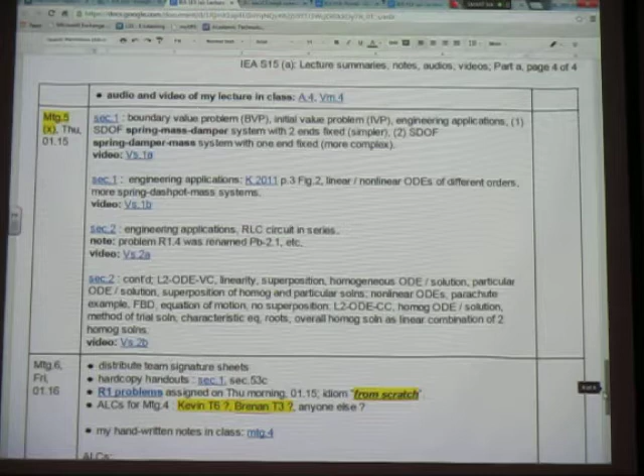Zoom in here. Yeah, I printed this out already. Maybe don't pick up the loose leaf. I'm never doing that, dude. I'll pay for it. For myself. It's not like he pays for it. Yeah. I'm just curious how long we're going to do it. It's usually a week, 2 weeks. Nothing left for me. Maybe I still have it for me. Yeah, I have the loose leaf here, I think.

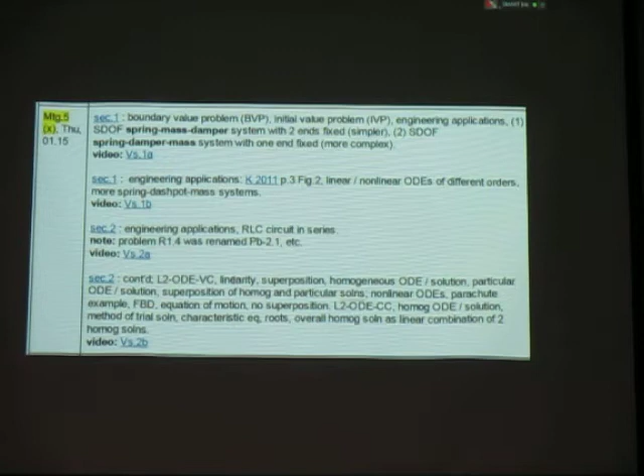This is the extra meeting for yesterday, what I call meeting 5 with an X for extra meeting. That's essentially a review of scalar differential equations that you have seen in the differential equations course. And I have the lecture notes, as well as the lecture videos that I created. So lecture notes, for example, section 1, then you have the videos in 2 parts. And section 2, you also have the videos in 2 parts. So for those of you who need to review, you can make use of these resources.

And I gave you the hard copy of section 1. For those of you who came late, check with your teammates, because they probably kept a copy for you. Section 1 is on 4 pages on 1 sheet. Same thing for section 53C, which we will do after we finish section 53B. I would encourage you to print out a hard copy. Even printing 4 pages on 1 sheet, it's very readable, very legible, because the font size was large. And in the back, you can write notes either on the lecture notes or on the back of the sheet.

Okay, so that's about section 1, and that's also related to report R1, the problems in report R1. So I'll talk about that. The R1 problems can also be accessed through the portal. If you go through the portal, I have a link. Let me zoom, so it's easier to see. Here is the link for the problems for report 1. You can access it through various means. The portal is very compact, so it loads up very fast, or you can also access it here, because whenever I do something, I always have a few points as a reminder in the daily summary.

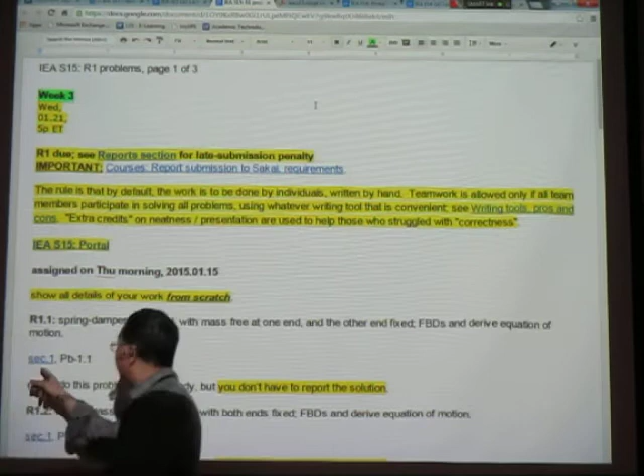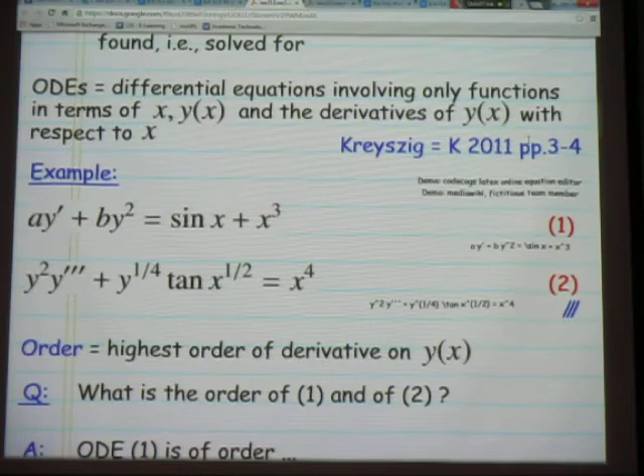And to each problem I have a link. So for example here you see section 1, problem 1.1. So you can click at section 1, you see my lecture notes, and you look at problem 1.1, that's where the statement is. Okay, there's no need for any text here. If you would like to read something to complement, that's fine. But this is where the lecture notes and the lecture videos are on this topic, and the problem number is also listed in my lecture notes here.

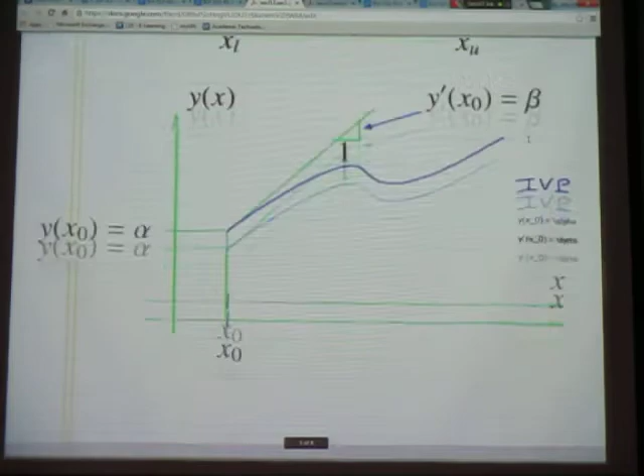So I have lecture notes, lecture videos, and we'll come back to this problem soon. Okay, so the problem numbers are listed here. So everything is very convenient. There's a link, just click at the link, it brings up the lecture note, and I printed out my lecture notes section 1 to give you as a hard copy too. So you have a soft copy, hard copy. It's very easy to find. If you are still confused, please feel free to ask. And you have a team, so your teammates can also help out as well.

And I have provided the self-help solutions, which were the best solutions and best reports from last semester. I really suggest that you try not to look at the best solution, do it on your own, and just if you get stuck, then look at that. But I'm here, Michael, your teammates. There's a lot of resources. Okay, so I have also reduced the number of problems that you need to report in your report. So a lot of steps have been taken to really make your experience smooth.

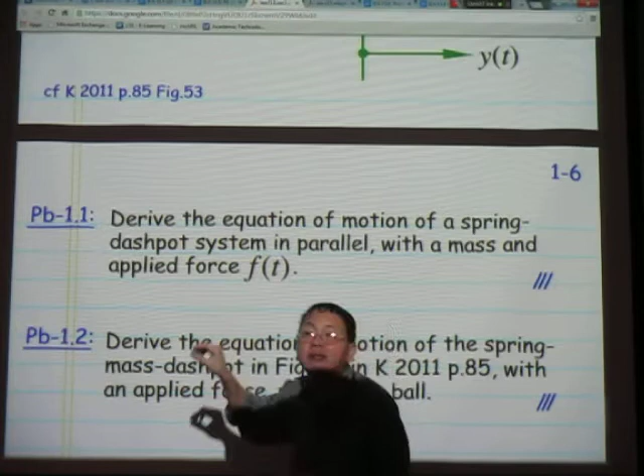So if it's something like this, it's not sufficient, it's not self-contained, then you have to go and look somewhere else. Okay, so you want to rewrite the problem statements as self-contained as possible. And the reason that I write as compact as this is because whatever I have written in my notes upstream, that's part of the problem statement. Okay, is it clear to everyone?

All right. And you have the model reports. Talking about the model reports, if you bring up the portal and you go to reports, here I provided some really beautiful work.

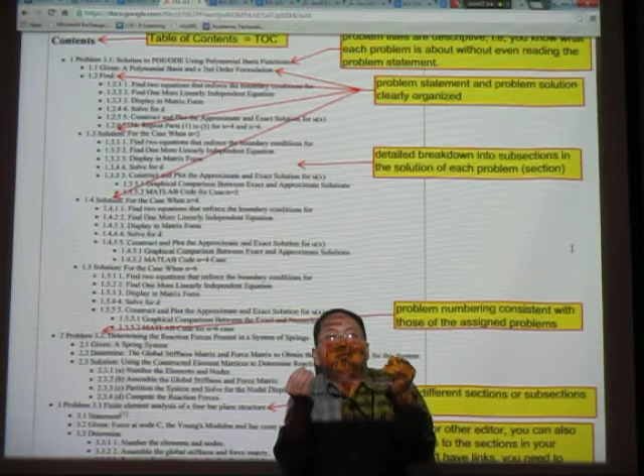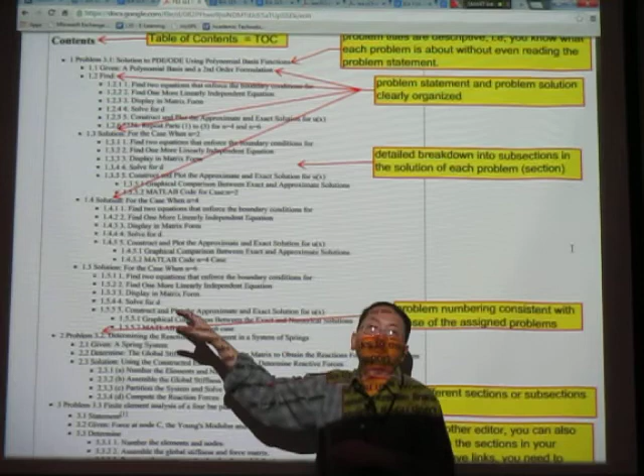This is graduate level, but I have also provided reports at the undergraduate level as model reports, in addition to the best solutions and best reports that are in the resources. Table of contents: when you read the title, it really gives you an idea of the content of the problem without having to look at the problem. That's what you want, right? You don't want to have just the numbers, but a descriptive title in the table of contents. And there are more that you can go through and see what would be desirable.

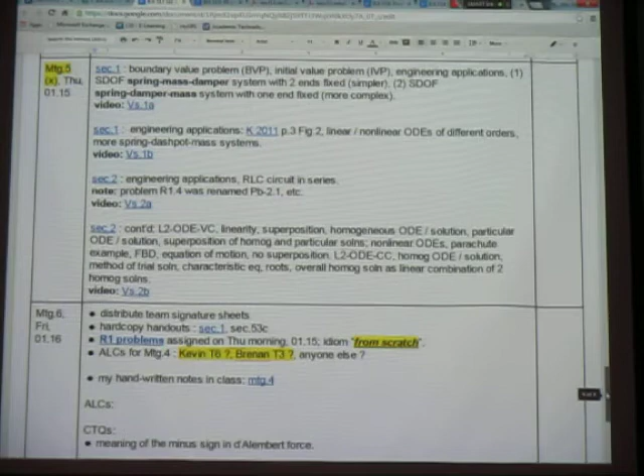Okay, here I mentioned best report to emulate. Oh, I just moved best report to emulate to the top. Okay. All right, so that's the model report there. This is the portal. And so you have lots of resources and places to look at to emulate. Excellent.

Okay, so last time I had mentioned, I remember, this is just after I came back. So Kevin, team 6, and Brenan. What team number, Brenan? Is it team 3? Yeah. So as I advise you, really look at this document every day, and if you see that your name is missing, send me an email. Okay. Yes, you have a question.

How would you like us to submit the reports? Through Sakai. There's a requirement of how to submit. PDF, all PDF. Yes, please. No hard copies.

So let's answer. I'm sorry. I know your name. I need to learn your name. I know I have written it up here. Morea. Okay. Yeah. Yes. Okay.

If you go to report 1 statement, you see here, course report submission to Sakai requirement. So please look at this. Everything is made in such a way that it's convenient, just one click away from the information that you need.

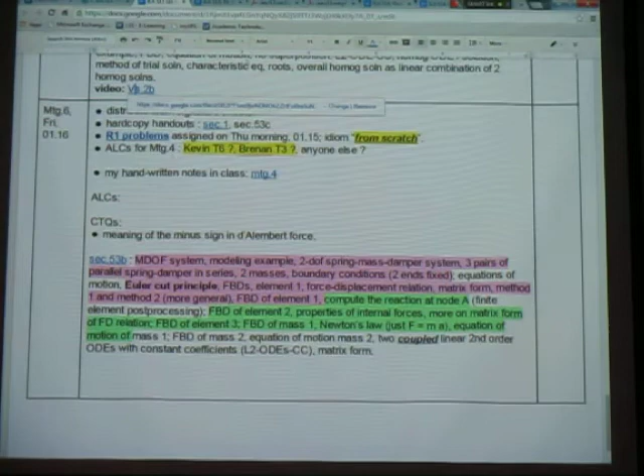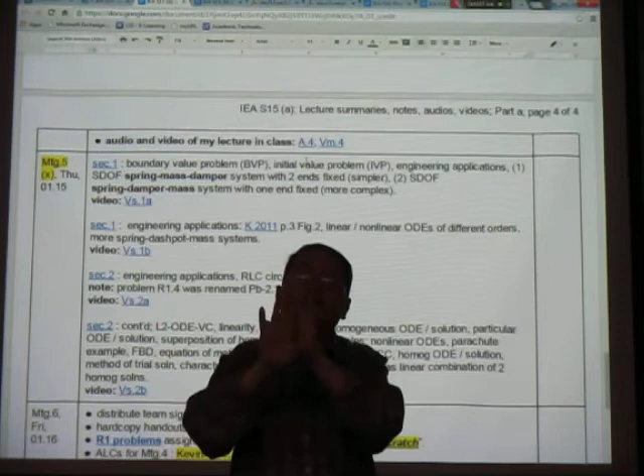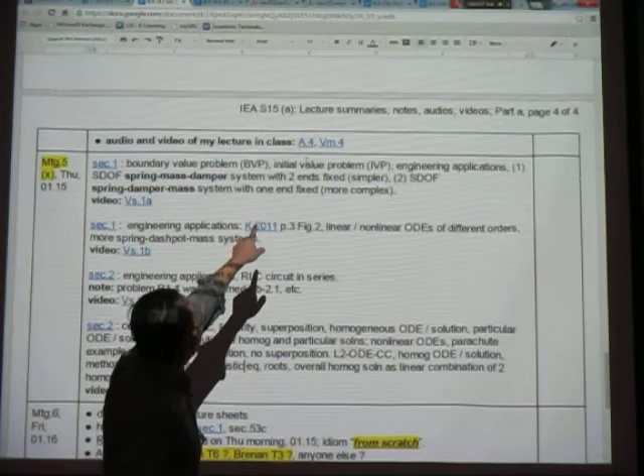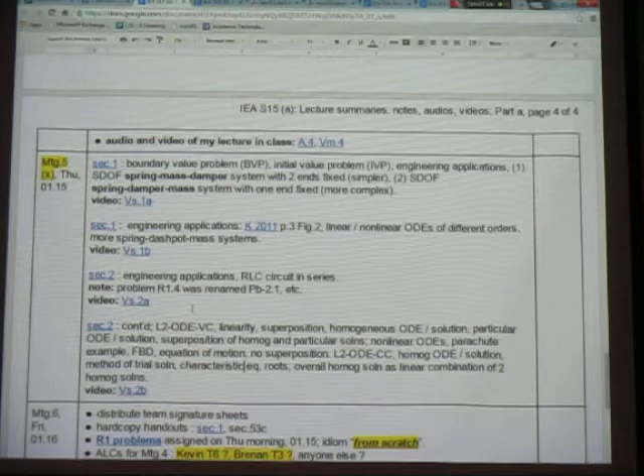This is talking about the video and the audio. If you want to listen to the audio, or synchronize the audio with the video, the sound of the video is pretty good because it's close to me. But if you need to synchronize the audio that I recorded through Audacity and the video from the camera, if you use Google Chrome, you can just click and play. You don't need to install the audio codec. But if you want to download and play on Windows Media Player, I gave the instructions at the top of the document. Okay.

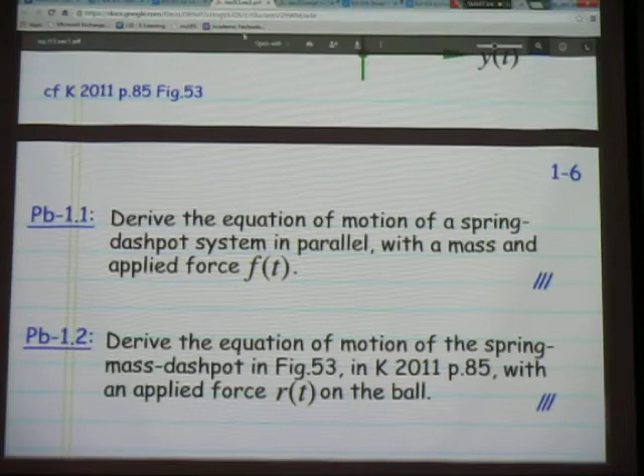So if you have further questions, I can entertain any questions. If not, then let's. You got one right here. Yes. I need to learn your name. So we'll come to your questions and Kyle's questions too. I have it written here, the question that you asked me at the end of last class.

One more question for the report. Is it just one report that we submit for the whole team? One report per team, yes, unless you do it individually. And one person will submit it for the team? Yes, one representative submits on behalf of the team. Suppose you have a team of 6 or 7, and 1 or 2 want to do it individually and the rest do it together, then there would be 3 reports, right? Anyone who wants to do it individually submits on their own, and the rest submit as a team. Is it clear? Maria, question.

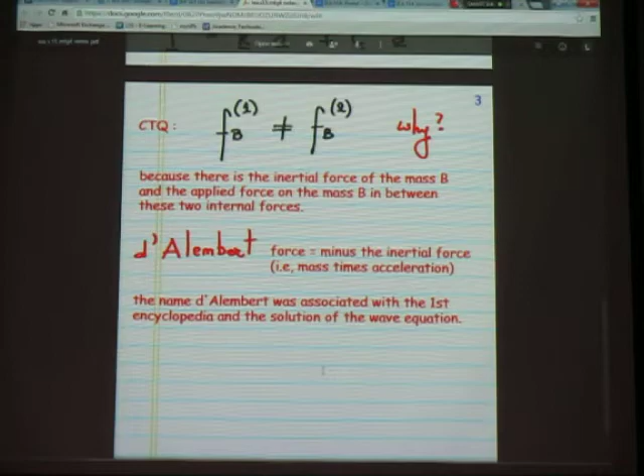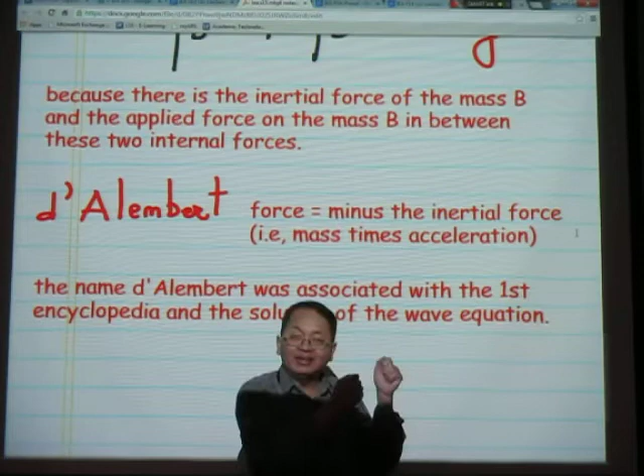Okay, right. So let's start meeting 4. As a way to have continuity with what we did last time, this is the note that I have annotated, my handwritten note from last time. And so this is the D'Alembert force. I think Kyle at the end of the class asked about the meaning of the minus sign, and I gave two times in the last lecture the physical meaning of an accelerating car: your body is pushed back against the seat.

And what's your name again? Matthew. Matthew, what team number? Team 8. Team 8, okay.

Matt also asked me a similar question, and so I thought of a different way to explain this. So let me bring up my journal tool. Okay. And I need to turn off this one here. Okay.

Right, everyone heard of the famous expression F equal to ma a long time ago. So let's say you work only in the one-dimensional case, and you have a particle moving on a straight line. Let's say this is the particle; you can have several forces applied. Even though it's in one direction, you can enumerate them. And let's say this would be the direction of motion, right?

Let's say the displacement, which is time dependent, and you can think of this as a force F1, also a function of time, and force F2, function of time. So this force F here is really the sum of all the forces acting on the particle or the body. You can write F as the sum of all the forces Fi, time dependent, i going from 1 to whatever. So in this example, 1 to 2. And of course, clearly, F is also time dependent, because all the individual forces are time dependent.

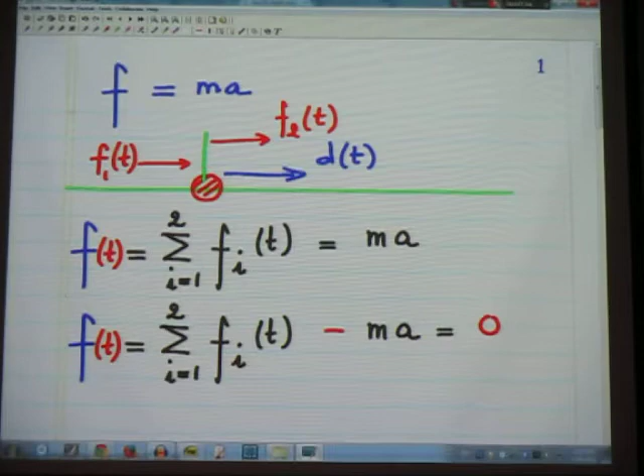Yes, Anderson. So could you say that the D'Alembert force is a restraining force causing the mass to move with the system? It's essentially just a representation of the inertial force. Think about the car accelerating: when you accelerate your car, your body is pushed back against the seat. So that's the physical explanation, and this is the mathematical explanation of why the minus sign and why you sum the forces. I hope it's clear to everyone.

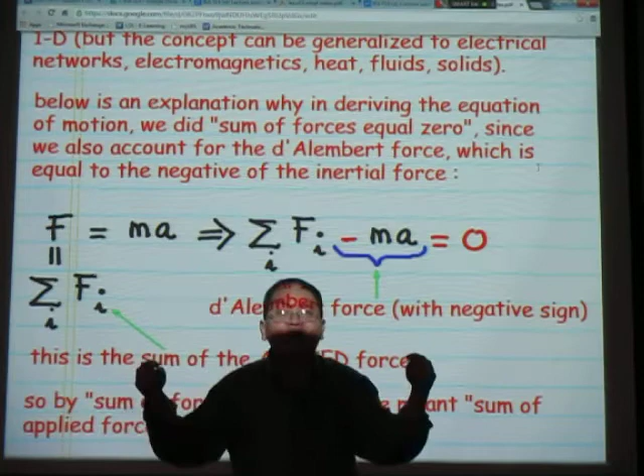And you can also, as I mentioned, look ahead. This is the fall 2014 portal, and if you go to part A of my daily lecture summary and do a search for D'Alembert force, you see that I have a critical thinking question by a student in the class. Let me zoom in to fit. I have also written my handwritten notes in class, meeting 26. If you bring up meeting 26, you see that indeed I explained something very similar to what I just explained to you. But this class is more advanced than last class because you asked this question much earlier.

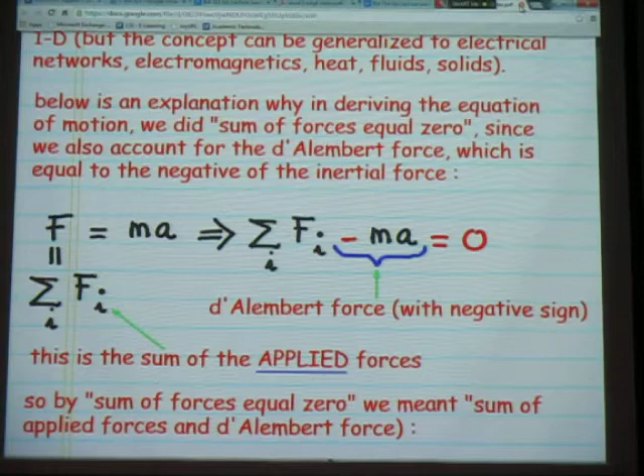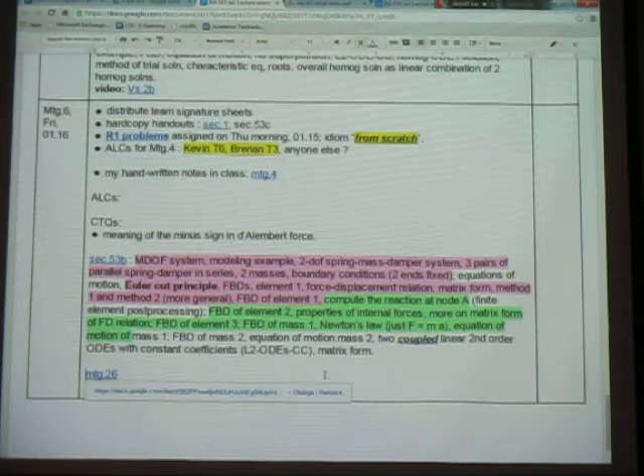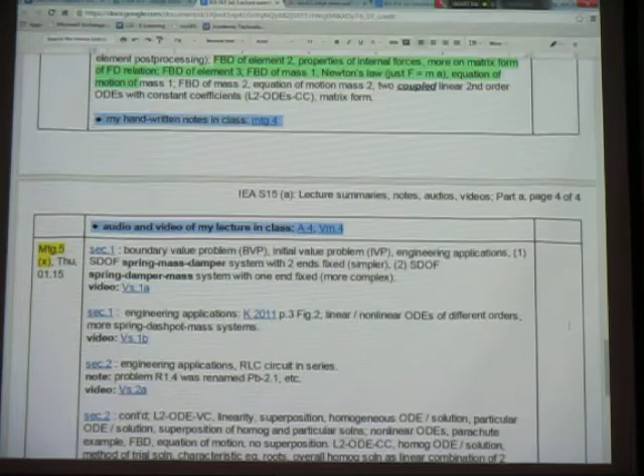So this is another resource that you can use, and I will link it. Yeah, I can do that right now. I just need to copy and put it over here. And I need to mark down that this is fall 14, so that you see that this is from the fall 2014 version of the course. I'll reorganize later. I just need to remove all the links here, and this is meeting 6. Meeting 6, when it's not preceded by a semester, means it's the current semester. And for this, from the fall 2014 semester, I would put here: see also. Okay.

Is it clear to everyone? Okay. Please feel free to ask if you have further questions. This part I should have put in magenta because that's what we did in the previous lecture. Okay, so I'd like to move forward.

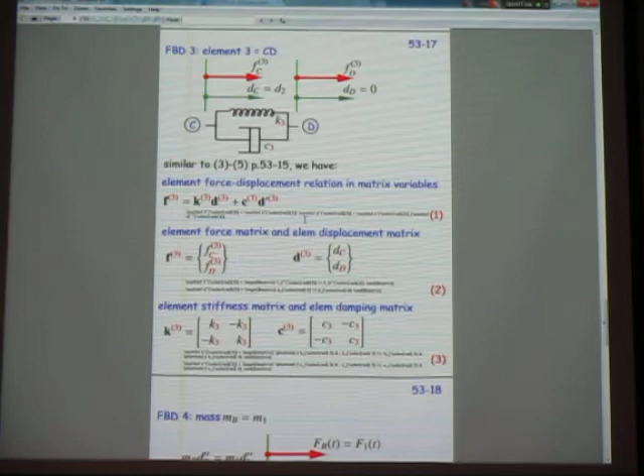So let me close this. I think I can close this now. And I'd like to continue with the discussion and finish section 53B, hopefully. Okay. So, probably very familiar with this now. You have the hard copy, so let me just use one window. We have gone through this. This is element 2 and element 3. We have gone through this, and we started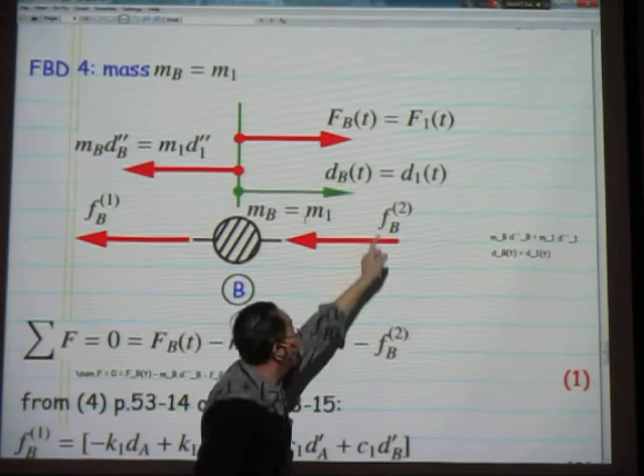with the equilibrium of the mass, and there was the issue of the D'Alembert force, right? So now everyone sees that the D'Alembert force is pointing in the negative direction, meaning opposite to the assumed positive direction of motion, right? This is the direction of motion. Okay, it's an algebraic quantity, meaning that it can be plus or minus.

All right, so I just explained why you sum forces equal to 0, even though this is dynamic, but it looks like static, right? Because the D'Alembert force with the minus sign allows you to think like statics. Sum of forces equal to 0, but really you do dynamic formulation. All right, and so now we have the internal force at B due to element 1. Let me zoom out so that you have the picture in mind.

Right, we have two internal forces at B, one due to element 1 and the other due to element 2. And we have obtained the force displacement relation for the internal force at B due to element 1, given in this expression, where K1 is the spring constant of element 1, C1 is the damping coefficient in element 1, dA is the displacement at node A of element 1, and dB is the displacement of node B. Here we have not included the boundary conditions yet; we'll do that later. And dA prime and dB prime are the velocities of node A and node B.

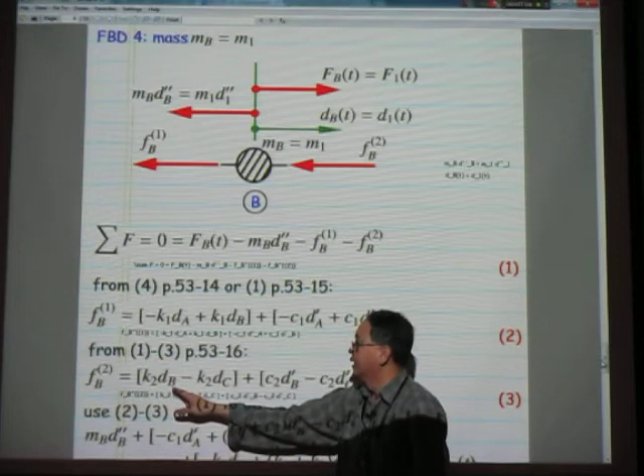And likewise for the force at B belonging to element 2. The only difference between this expression and this expression is, be careful, this force is on the left of element 2, whereas this force is on the right of element 1. So you need to be careful with the sign. From the matrix expression that we obtained earlier, this is the expression for the force at B due to element 2. You see the spring constant K2, the displacement at B and at C. Remember, B now is on the left of element 2, and C is on the right of element 2.

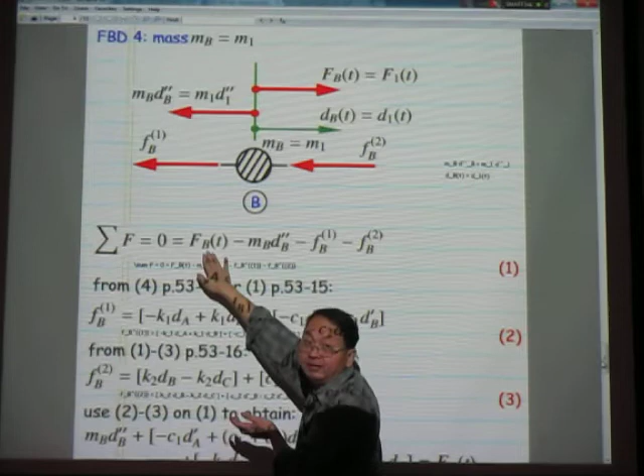And here is the damping force in element 2. You have the damping coefficient C2 and the velocity at B and velocity at C. So replacing these two expressions in this sum of forces equal to 0, remembering the D'Alembert force, minus the inertial force, and not forgetting the applied force FB as represented up there, then you have the equation of motion for the mass MB as shown here. It's just a direct substitution of these two expressions in the sum of forces equal to 0.

And Jackie, you asked a question. I figured it out. You figured, okay.

All right. So if you have any questions, please feel free to ask. Otherwise, we proceed exactly in the same manner. We looked at the mass B. Now we look at the mass at C, also known as M2. That's the fifth free body diagram. Same story. Let's zoom in. Let's recognize the forces now. Everything is the same except the names.

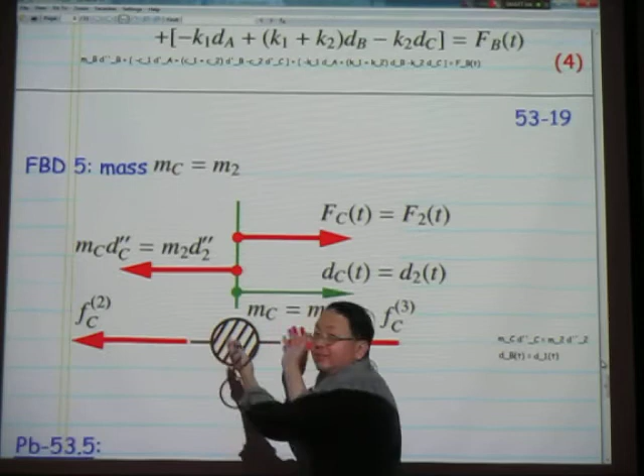Point C. Mass MC, also denoted as M2 because this is the second displacement degree of freedom. D sub C is the same as D2. You cut to the left and to the right of this point; you have the force at C due to element 2 because element 2 is now sitting to the left of point C, and to the right of point C you have element 3. So the internal force due to element 3 is the force F at C due to element 3. The inertial force, because the assumed motion is always positive, so this is the displacement of this mass.

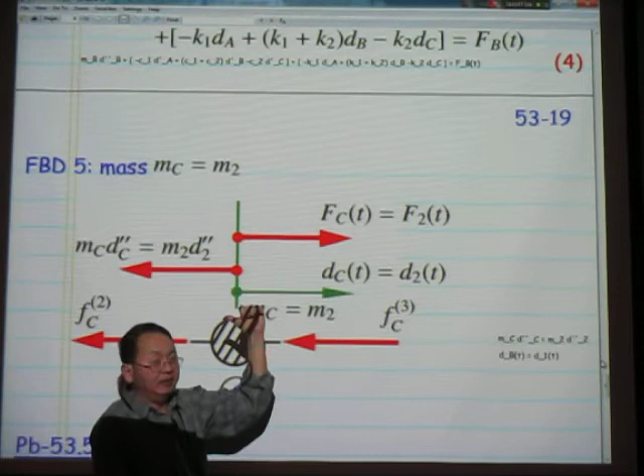Again, algebraic quantities. If you do the computation, and if the sign is negative, it just means the mass goes in the negative x direction. But algebraically, you always assume positive. Then the D'Alembert force is minus the inertial force, and the minus sign is included in this arrow pointing in the negative x direction.

So you do exactly the same, and please do this problem as a self-study problem. It's identical to what I did above for the mass at B. Sum of forces equal to zero. Then you find the expression for the force Fc due to element 2 in terms of the displacement in element 2, and the force fC due to element 3 in terms of the displacement in element 3, and you substitute into that dynamic equilibrium equation. Then you obtain this expression.

Okay, let's recognize a few things before we move on. So you see mass at C, let's zoom out a little. Inertial force plus damping force plus spring force equal to applied force. Remember that structure. Inertial force, mass times acceleration. Mass at C times acceleration at C, dc double prime. This damping force looks a little more complex.

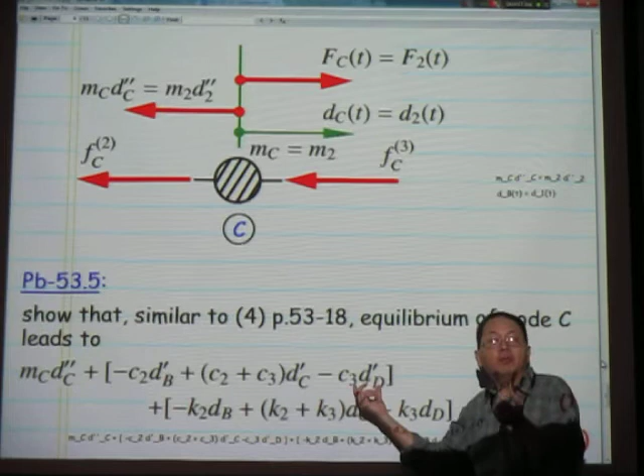But you have also a contribution due to the velocity at B because point B is also moving, but with a minus sign. Minus C2 dB prime, velocity at B. Likewise, point D, in general, without applying any boundary conditions yet, point D would also move, and the contribution to the equation of motion of point C is this term, and that has a minus sign: minus C3 dD prime, velocity at point D.

Now observe that the mathematical structure of this term is exactly the same as this term. The only difference is just the symbol: minus C2 dB prime, minus K2 dB; C2 plus C3 dC prime, K2 plus K3 dC. Here you have displacement, here you have velocity.

I understand why the C2 dB prime and C3 DD prime are negative, and then those middle terms for both lines, what makes them positive again? Why are they positive rather than negative?

Well, first observe this, and I'll come back to the matrix. You remember that the stiffness matrix is not all positive. We have minus k, and k minus k, and then minus k. So the negative sign essentially comes from the assumed positive direction of the internal forces.

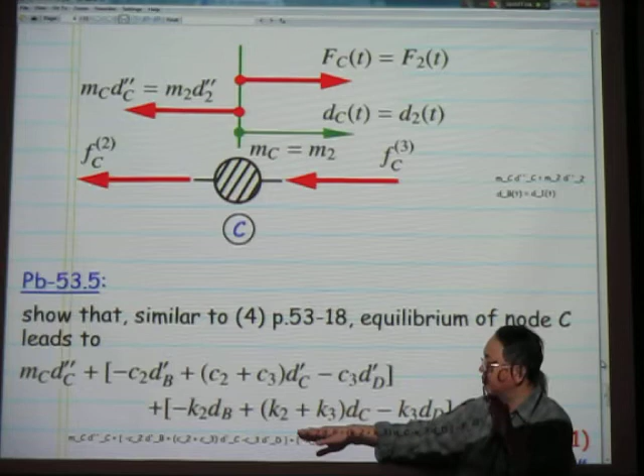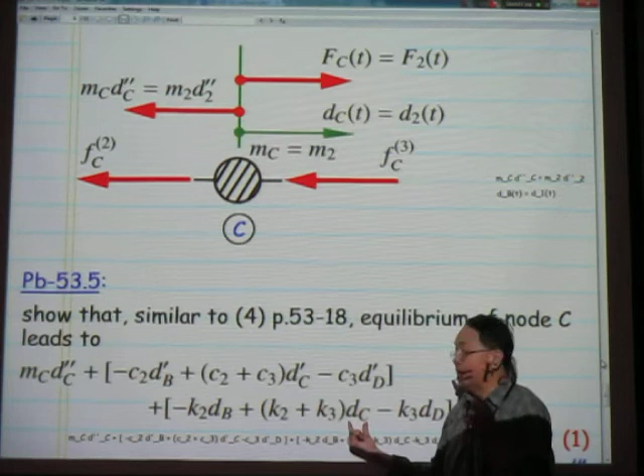But let's observe this: the mathematical structure of the damping term is the same as the mathematical structure of the spring force. The difference is the coefficient, the name of the coefficients: damping coefficient, spring coefficient, or spring constant. Here you have velocity, and here you have displacement. Otherwise, the sign is exactly identical: minus, plus, and then minus. The plus sign corresponds to the displacement on the point that you are looking at, whereas the minus sign is associated with the nodes to the left and the nodes to the right.

Let me bring up the same lecture notes, but on a different window, to review for you what I just mentioned to Kyle. You could have also asked the same question Kyle asked: why is there a minus sign? Why isn't everything positive from here? Because even if you look at the force FB up there, let me open up the mask. If you look at this equation by itself, you see that it's not all plus, it's minus. And the reason there's a minus is because you are looking at the stretch.

dB minus dA. Think of two points moving, right? This point may move with a larger displacement than this one. But if you are an observer sitting on this point here, and you want to look at how much the spring is stretched, you have to take the displacement at this end minus the displacement at this end, because this end is also moving, and you want to sit on this one to see the difference. So the minus sign already started from here. Be careful, it's not all plus signs here.

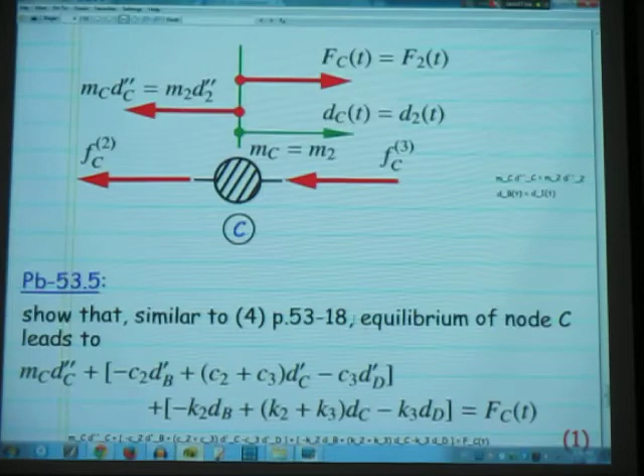All right, so... let's see how much time. I should give you some time to think while I do this. Use the opportunity to think.

What team number? Team 6. And Mark is team 8. Anyone? Anderson? Team 7. Okay, if anyone else that I forgot contributed to the understanding of the class, please ask a question about the book. Yeah, ask a question about the book before. What I meant is understanding of the content of the lecture. So for administrative, in the future administrative questions, that's extra, that's separate.

All right, let me wrap up here. We have 5 minutes. So now you apply the boundary conditions. Point A is fixed, point D is fixed. So displacement at A is 0, and therefore velocity at A is also 0. Displacement at D is 0, so that equal to 0 at any time. And therefore velocity at D also equal to 0.

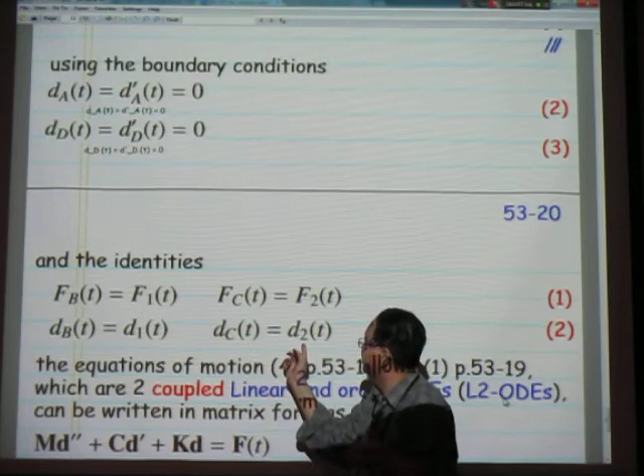And here the next equation is simply just to, instead of writing with the letters B's, you know, change it to 1, right? Because mass B has displacement dB or D1, the first degree of freedom. And likewise, instead of writing F sub C, you write F sub 2. So we change all the indices into the numerical representation, right? So D sub C is D2, the second displacement degree of freedom.

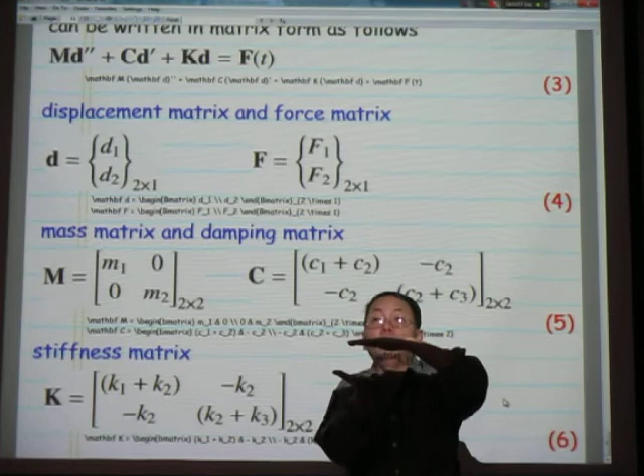Then you see this is the structure, and this is what you want to remember. Again, right? This is the equation of motion. It's two coupled second order ODEs, written as you have the inertial force, that's the mass matrix, times the matrix of the acceleration. This is the mass matrix here. M1 and M2 are the masses at B and at C. The off-diagonal coefficients are 0.

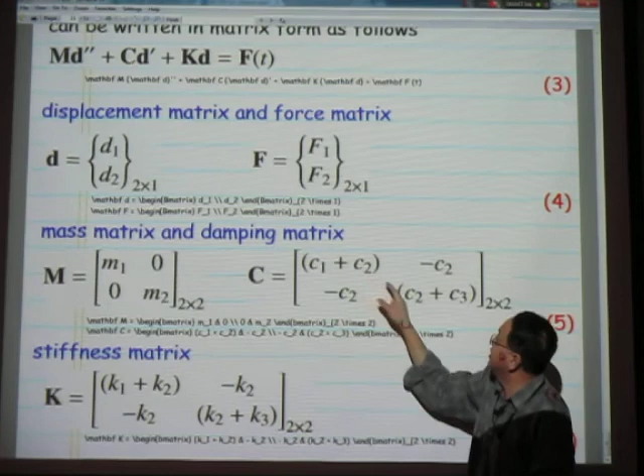The second term is representing the damping forces. This is the damping matrix. Note on the diagonal you have C1 plus C2, C2 plus C3, but minus C2, minus C2. And likewise, the stiffness matrix is very similar to the damping matrix. From the point of view of mathematics, the difference is just the symbol, right? On the diagonal, you have the sum of the two stiffness spring constants, K1 plus K2, K2 plus K3, and then minus K2. All right? So this is the system of two equations that we want to solve.

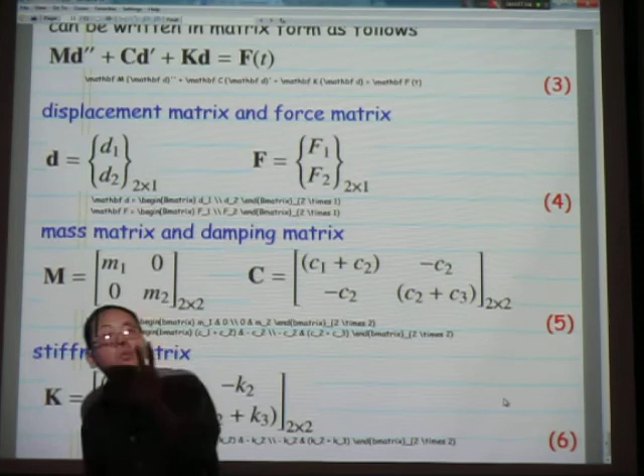Okay, and that's what you learn. That's what's new in this course. Last question before you write the summary: why do I say that this is two coupled equations? Why are they coupled? In other words, why are they not independent?

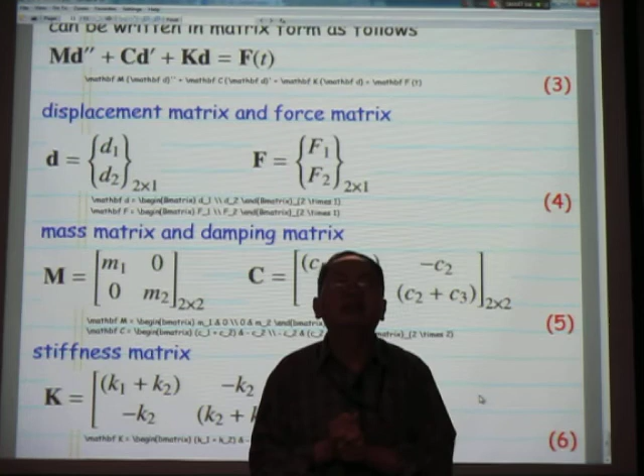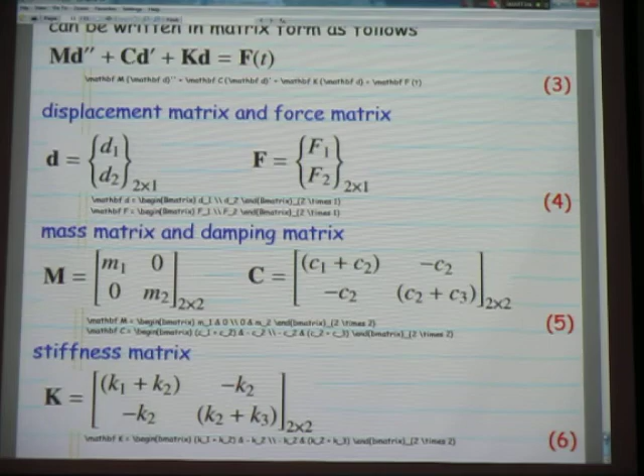Let's say, Kevin: well, they both depend on some of the same stuff, like they both depend on the same damper and the same spring constants, right? Close, no cigar. All right, Anderson, let's say Mark Anderson, you've contributed a lot. Somebody new: they both depend on the displacement of the mass. Okay boss, let me bring in someone new. Yes.

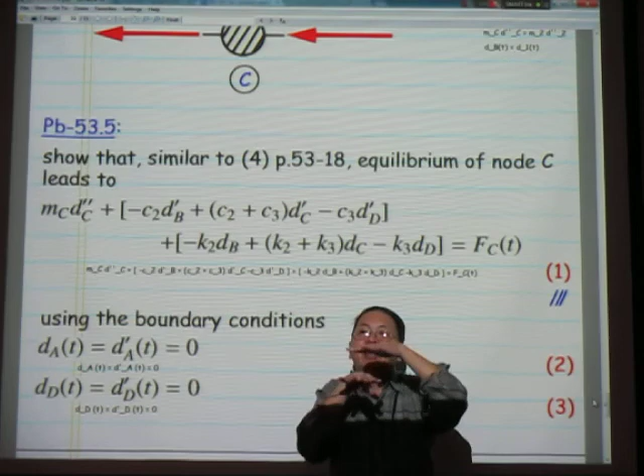Let me give you a hint. So left side has 1 and 2, and right side has 2 and 3. Okay, so let me give the answer. Look at this equation, you have the displacement at B as well as the displacement at C. It's like two unknowns within the same equation. So if this equation depends only on one unknown, then it's independent from the other equation. Here you have two equations, and in each equation you have the presence of two unknowns.

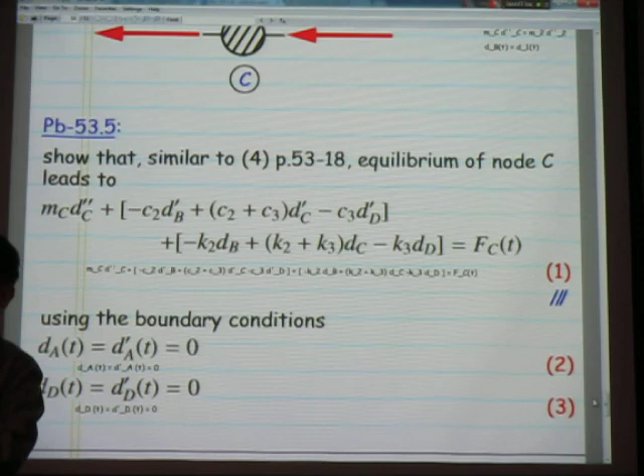So please write the lecture summary, and we'll continue next time. If you have any questions, you can write them in the lecture summaries as well. I know it takes some time to think about this, okay? So if it's not obvious now, you need to think about it.